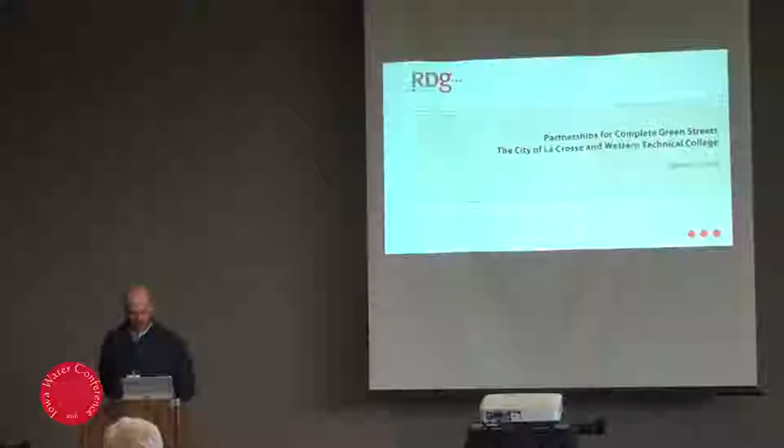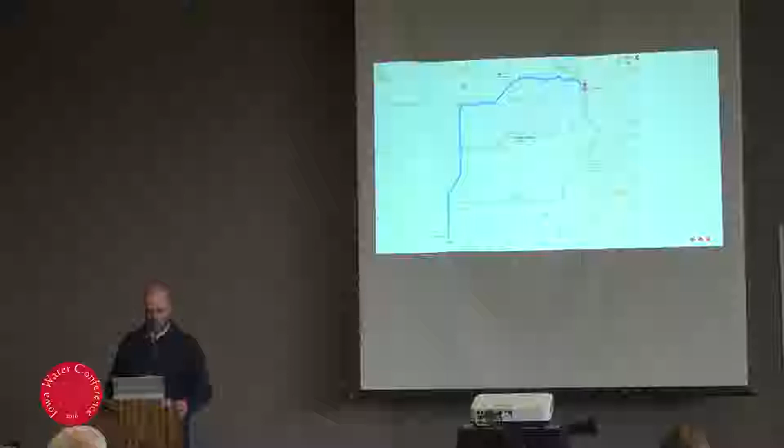So we're going to jump right in here. This is a project, a very focused case study on a campus that we've been working on for 10 years in La Crosse, Wisconsin. It's about 3 hours and 45 minutes north of here.

We're here in Ames. You head up to Albert Lea and take Interstate 90 over to La Crosse, which is in the Driftless region. Our project location is located about 6 blocks from the Mississippi River.

So here is the campus. If you're familiar with La Crosse at all, you come in from the west into downtown, and you can see by the amount of impervious cover here, it's a very urbanized environment.

We were working through a number of considerations really early on as it relates to stormwater, and this college really took this seriously.

So you can see their proximity here. The blue outline is their campus boundary. The Mississippi River is right back here in the background. There's actually a bog on the north end, and they're located on a historic floodplain along the Mississippi River.

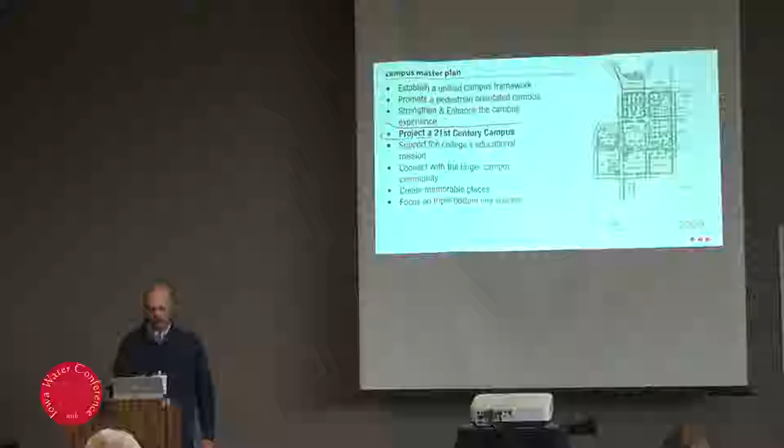Our project started in about 2008. In 2009, we completed a campus master plan. One of the key things coming out of that was they wanted to identify as a 21st century campus.

And what does a 21st century campus look like? There's a lot of emphasis on really trying to be cutting edge at that time. This is 10 years ago when we started thinking about these things.

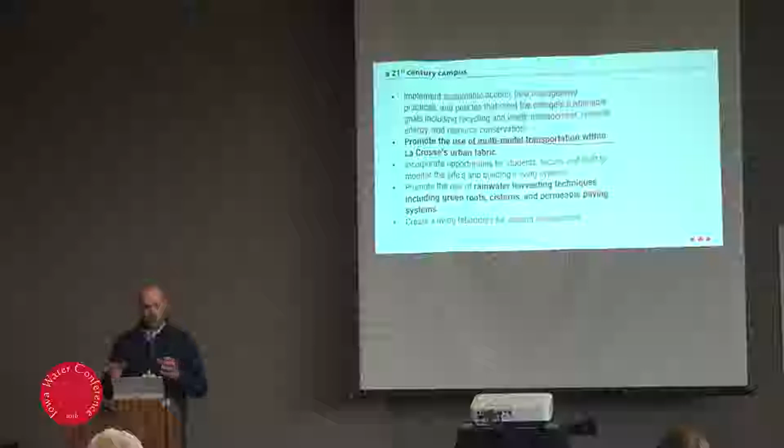Multimodal transportation was a key thing. They wanted to connect to the community. University of Wisconsin-La Crosse was there, and Viterbo was also there. So there was a culture about using transportation that wasn't always reliant on your car.

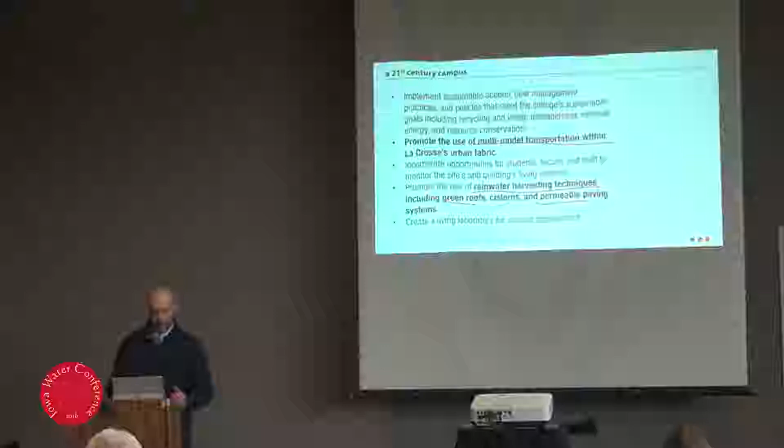They also thought very heavily of rainwater harvesting, green roofs, cisterns, permeable paving, best management practices, stormwater infiltration. These were all key things to them that would define who they were to the community and to the state.

So we took a watershed approach, and keep in mind we've been thinking about this for about 10 years, so we're going to go through a lot of information here.

One of the key things as part of that master plan was to integrate best management practices on all the projects. That was just a given - you will do this. And so that was really a great thing to be a part of.

Some of the other key things is that they wanted a reduction in flow for the 10-year event to help them comply with the City of La Crosse's stormwater utility. In La Crosse, the utility is $13 per ERU, significantly higher than most of the credits or the rate structure within the state of Iowa, so there's actually a financial payback to doing some of these things.

We were also helping them renovate from a sustainable design standpoint quite a few buildings on campus, serving as the lead consultant through our architecture branch of RDG, helping them identify strategies. As part of that process, we wanted to make sure that we complied with all the LEED credits.

So there are a number of layers here that we were working towards. One of the key things, they had set up this east-west axis through campus.

What we'll dig into here in terms of what we're calling our 8th Street project is this corridor, which was really also wanted to complement the primary flow of pedestrian traffic on an east-west basis. As they grow, residential uses were up here, and to the east. They wanted to bring these people safely down into the heart of campus, which is really these 4 buildings.

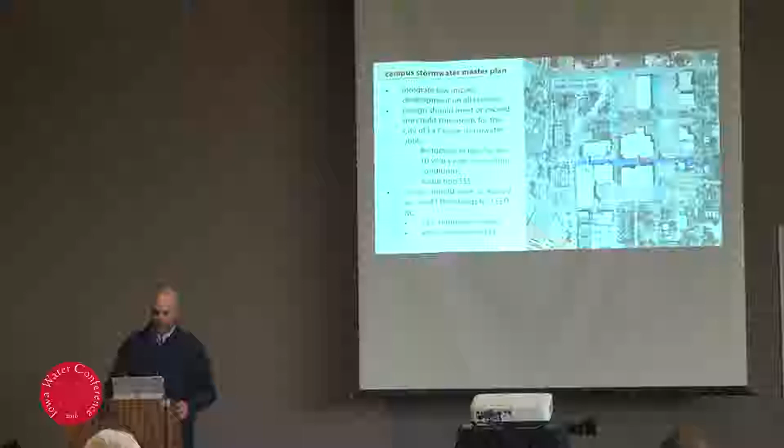When we're thinking about a watershed approach in an urban environment, we have to be mindful of where the water is going, where it's coming from, and what the existing storm sewer capacity was. We had a 60-inch storm sewer that was 100 years old, built out of brick, 18 feet below grade, and that was surcharged 6 blocks away from the Mississippi River, so we had to be careful about adding more water to that system. We knew we were trying to remove water from that system and get it into the ground.

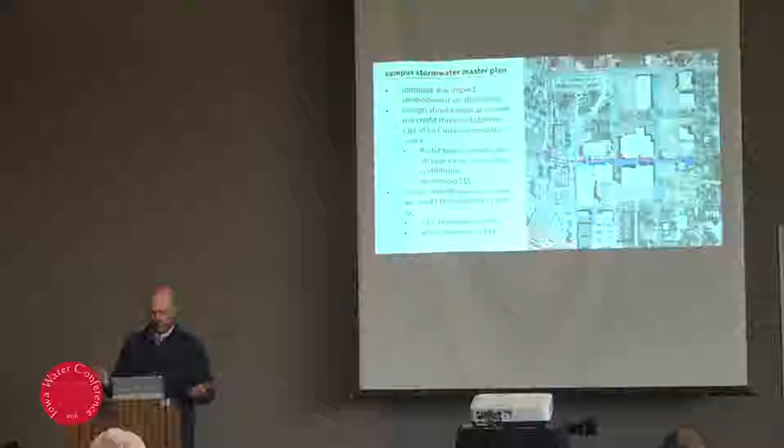We had good sandy soils here, so we were fortunate to be able to do that. But every space on campus, we had to think of if it was green, because about 90% of the campus is impervious. Any green space we had, we wanted to also think about as blue space. So we had this parallel track that if it was an open space, it needed to also function that way, working through all of those layers as part of the master planning effort.

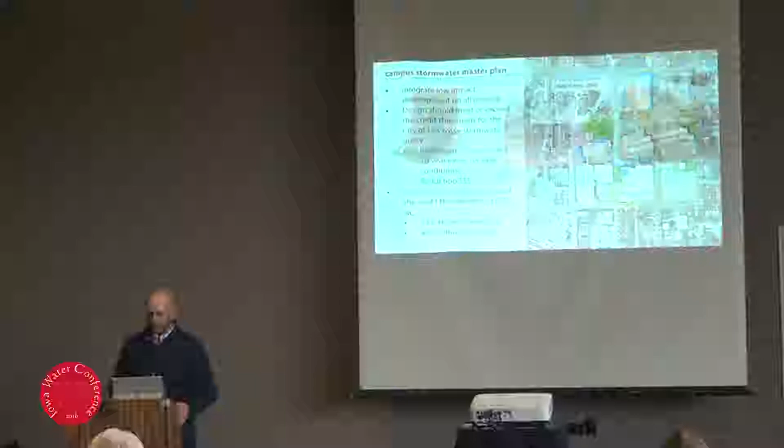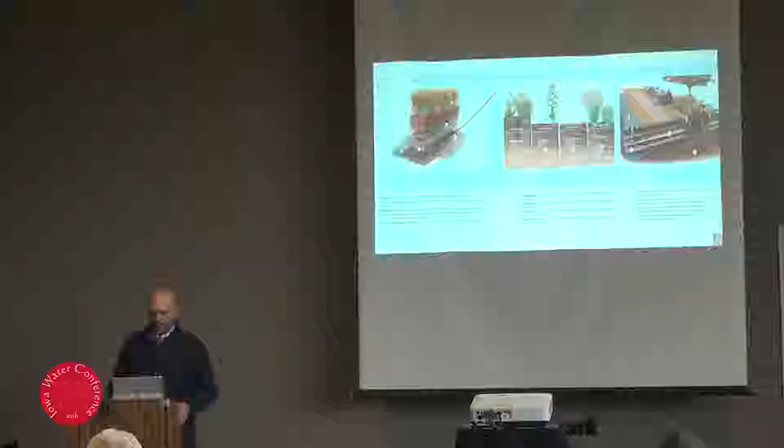We had a number of systems we identified through that project: stormwater planters, which is one we'll focus on, but also soil health was a component of all the plantings. We used permeable pavers where possible, rain gardens, bioswales, and porous asphalt. All of these practices are on the campus and have taken shape over the years. We also helped with a green roof and a 15,000-gallon rainwater cistern that we've actually been able to use to capture water and irrigate all of the plantings for 7 city blocks. It's pretty comprehensive, a lot of layers here, and when you're working in a city that's 100 years old, there's a lot of infrastructure below grade that you don't see.

In 2009, we did the first project that was built. There's a courtyard project, but the thing I want to focus on here is these traffic calming bump outs. These were designed for that east-west axis, this is one of the courtyards on the west end of it. We put these bump outs in to slow traffic, but also use them as an opportunity to infiltrate stormwater.

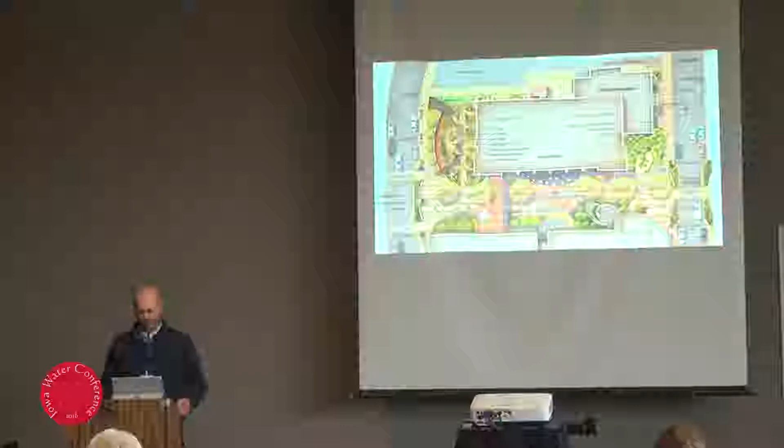We had to rely really heavily upon the Portland Stormwater Management Manual to get us going in the right direction. This was kind of cutting edge at that point in time, and we didn't know a whole lot about it, but we did a lot of education, educated ourselves, did a lot of research, and reached out to folks in Portland to talk about it. We came up with this master plan, and ultimately these bump outs had what we called stormwater planters at the time.

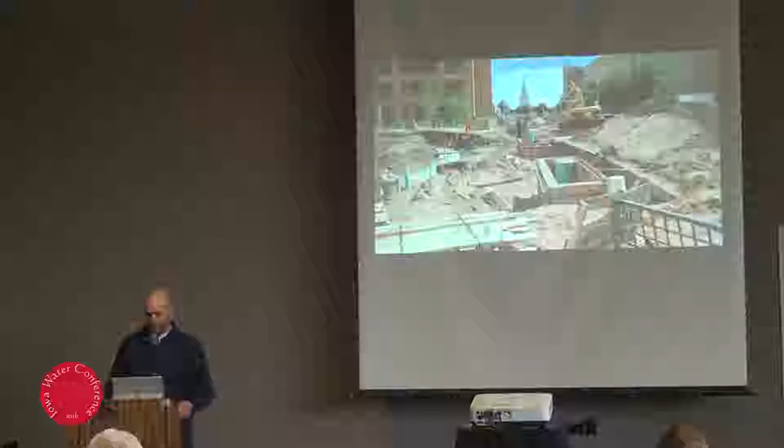Fast forward to construction, and this was really a nightmare. Our survey wasn't the greatest, and sometimes things get missed, but when they opened up the street, they found a 6-foot by 6-foot duct bank with the City of La Crosse's primary. We had designed this great system of sediment sumps where water would flow into the back of curb, the sediment would drop out, and then it would overflow into the planter and infiltrate. That no longer could happen, so we had to rethink how that system worked.

We ended up putting erosion control stone on the surface, having crews come back and replace it every so often. We were able to get it into these 2 planters here, but in the back, where that bump out is, we had to go to all-surface treatment to remove the sediment. We did it on both sides of that city block of the courtyard, and it took an entire summer to do 6 planters, all cast in place, down to frost so they wouldn't move. There were limestone monuments and gateways on top of them. It really just took a really long time.

After talking with the college, we thought we need to find a better way. So fast forward, a couple years later we started thinking about this project, and it didn't get built until 2016 and 2017.

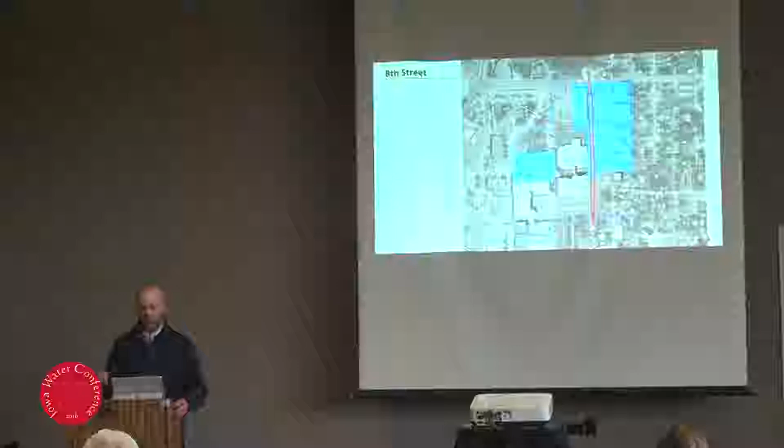We call it the 8th Street project, the north-south pedestrian axis. It's also a fully functioning street. The project we were talking about a moment ago was on the east-west axis for students. This is an image of what it looked like before, not very conducive to a friendly pedestrian environment. A lot of parking lot right up to the street, not a lot of open space, not a lot of buffering, not a lot of vegetation. Pretty harsh environment, and this is looking south down that street.

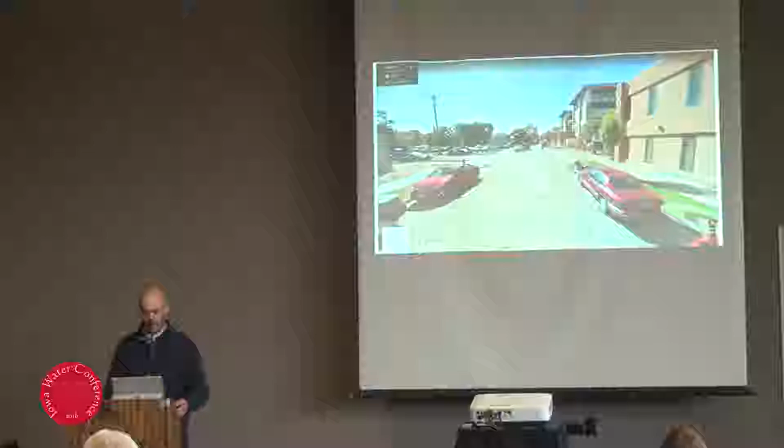In 2010, the college said they wanted more green space since they had none, so they asked us to look at a number of site plans for these parking lots. The photographs we showed were taken about right here, looking both directions. We wanted to find a way to save parking, since that was in demand, but also add more green space and create a pedestrian mall that students could traverse up and down.

We met with the city, and that was really a no-go. From a city planning standpoint, if you put your planning hat on, you don't want to interrupt the grid. So we were trying to balance campus planning versus city planning ideas.

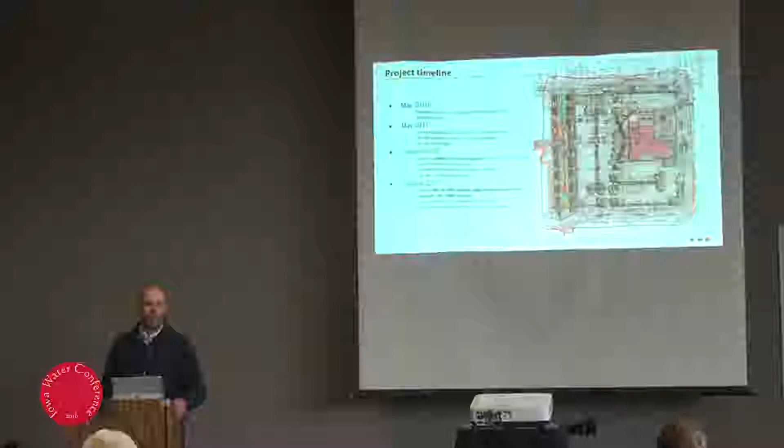So we came up with this idea: let's request a street vacation, but only for half of the street. In 2013, we presented the idea of a complete street concept where we would vacate 30 feet of right-of-way on each side so we could put in the pedestrian improvements we wanted and also use that area to infiltrate stormwater.

Most of the time, if you're familiar with the regulations of any community that has a stormwater utility, you can't use public space to infiltrate stormwater. So this was our way of getting around that.

We basically built a public street, but only half of it was really a city street. The city then got an easement back over the portion they vacated, so nobody really knows the difference, except now we can take credit for infiltration within that area.

As part of that agreement, we also agreed to manage all of the city stormwater through one system, so there wasn't city water and private water separately, it was all together.

Finally in 2014, the city approved the partial street vacation, and then we moved forward with construction drawings, with the preliminary and final design phases in 2015 and 2016.

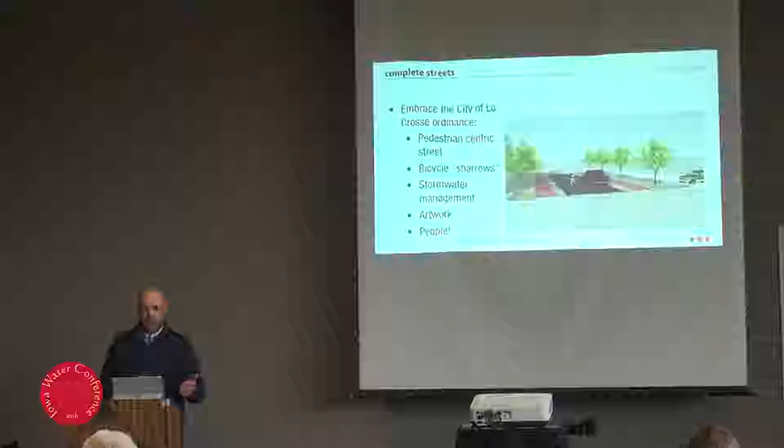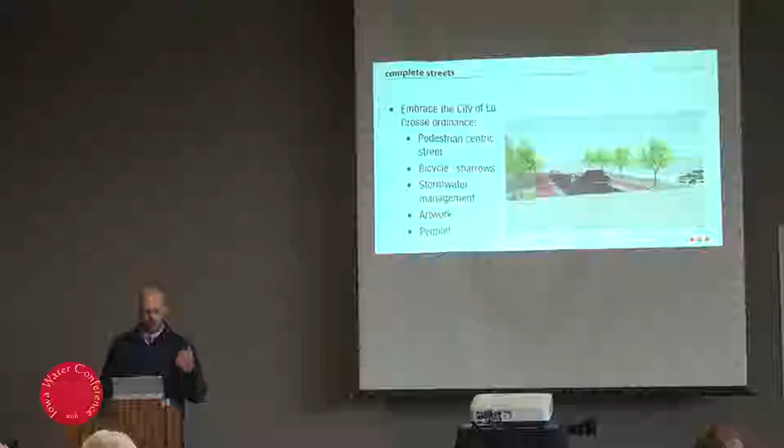These are some of the key things we had to go through as part of that process: looking at a pedestrian-centric street. The city had just passed an ordinance promoting complete streets, and they also needed to be green, so bicycles moving through here, pedestrians moving through here.

We didn't actually have a bus system on this street, but they also wanted it to be safe for people, with appropriate lighting and places to sit.

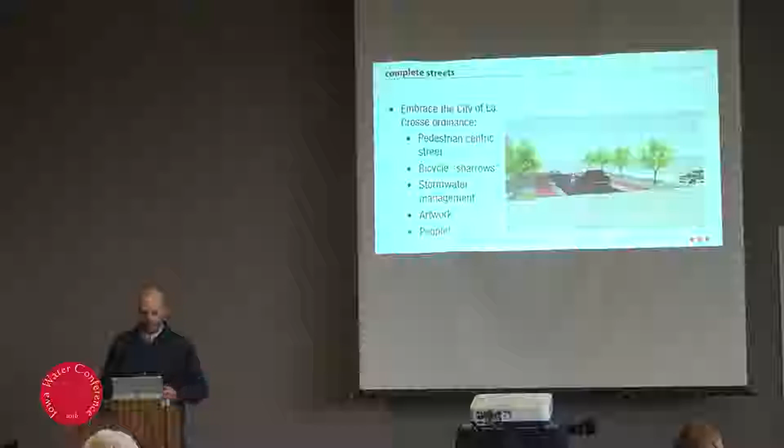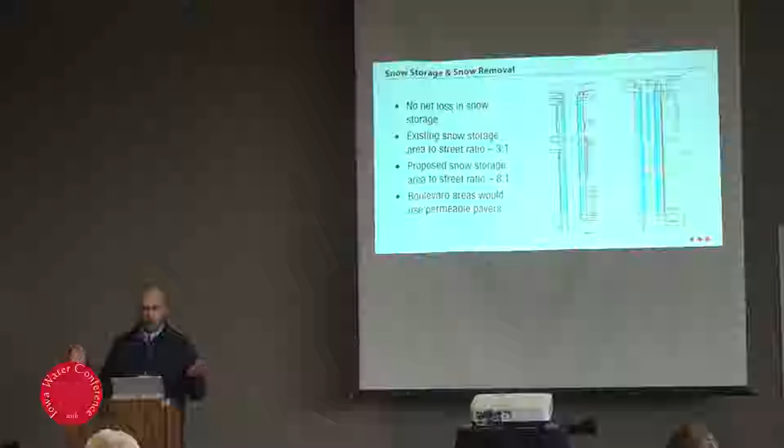There's also the very pragmatic things, like where are we going to put the snow? We had to go through an analysis, and we actually ended up with more snow storage area because we had less street to plow.

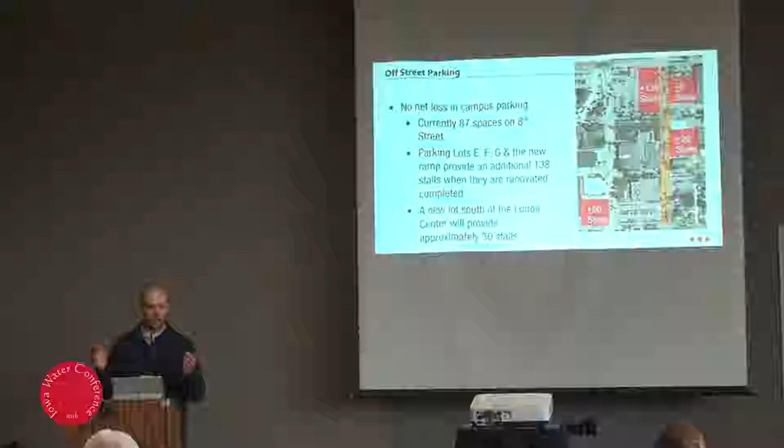We had to think about parking, and what we were going to do with all the parking that's on the street, because we were actually removing on-street parking. As part of the long-term campus planning, we looked at adding stalls elsewhere within a parking ramp. The college valued open space more than it did parking, so we had to work through that.

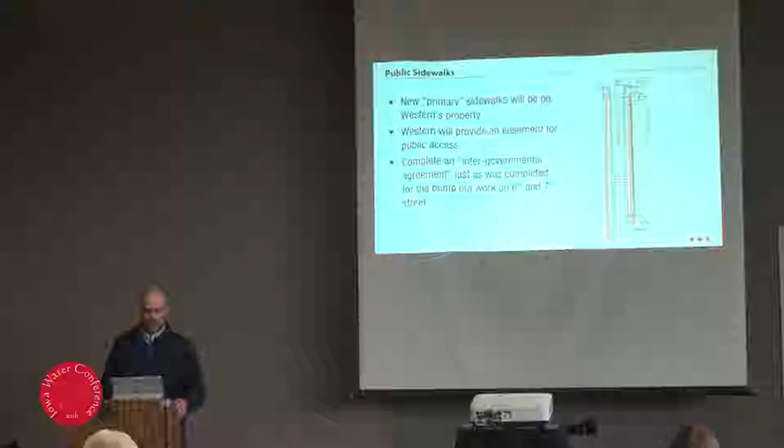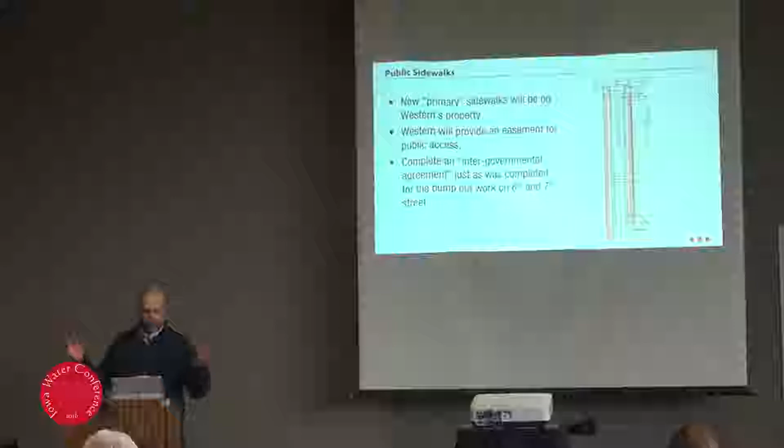Public sidewalks - showing them how the new sidewalks would be virtually in the same location, but would be better served because they would look better, be wider, and be more accommodating to the larger flows of pedestrian traffic.

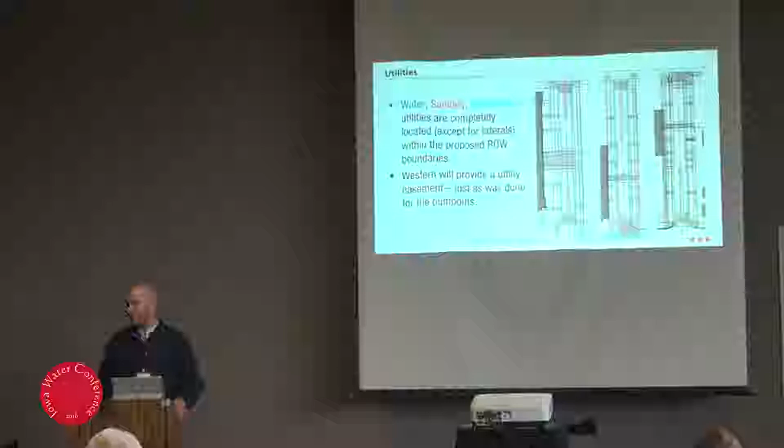Utilities - again, with it being a very old community, there were a lot of utilities, and we found quite a few underneath the street when we opened it up. They were always right where we thought they were going to be, right? Exactly, yeah - a new fiber line that wasn't on the survey, that was fun.

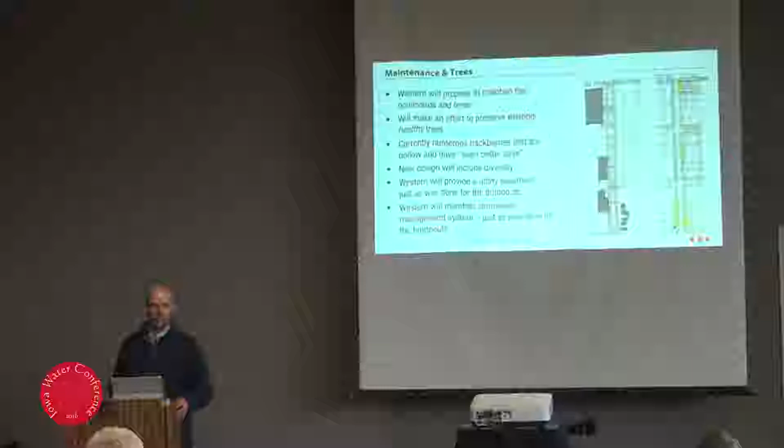Street trees - trying to make sure we preserved the healthy ones that were there, and there weren't a lot. We also added in new trees, since this is a Tree Campus USA, and they really valued having that canopy.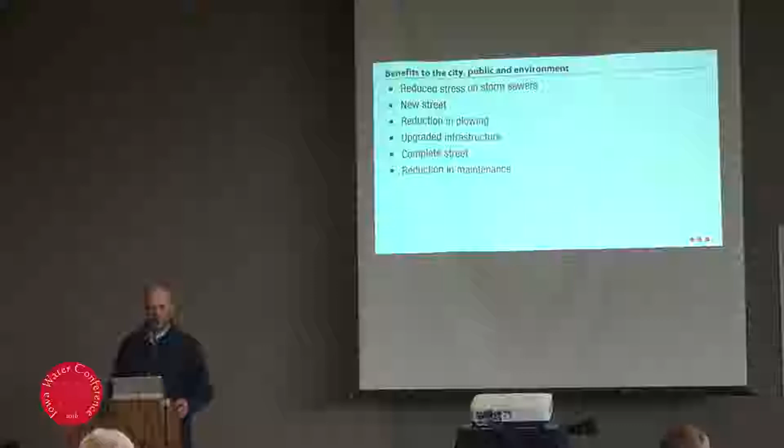Finally, after the city and the community came together, these were the key benefits: reducing the stress on storm sewers, the city getting a new street, reduction in plowing, new infrastructure, a complete street, and reduction in maintenance.

So now we'll jump into the engineering - Greg will walk us through that, and then I'll jump back into some of the design of the components.

So what we're showing today is really one of about 3 pieces that I've been directly involved with. I kind of joined this project mid-run. I joined RDG late in 2014, so I've been with this project for about 3.5 years now.

So this is just one example of how we looked at stormwater. We really wanted to make it hard for water to move off the site. We weren't looking at just having one practice on a site. We were looking at dividing the site up into multiple areas of drainage and really trying to look at installing practices in sub-watersheds scattered throughout the site.

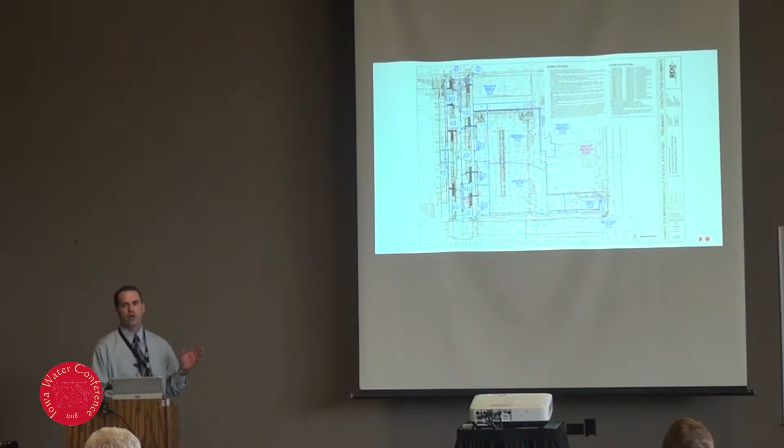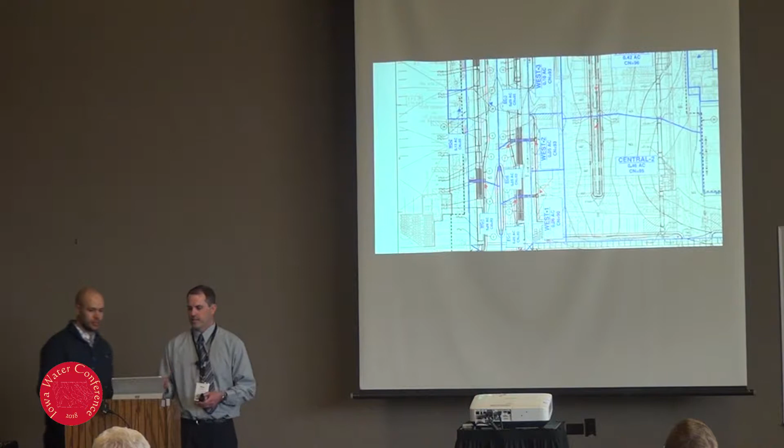So you can see a drainage map and zooming in how it all looks. Water is draining into some of these central islands, and then also some of these planter boxes through inlets, which we'll show some pictures of in a little bit.

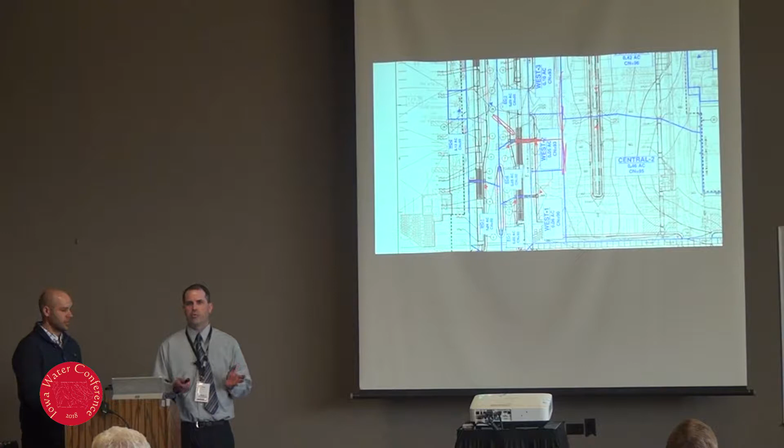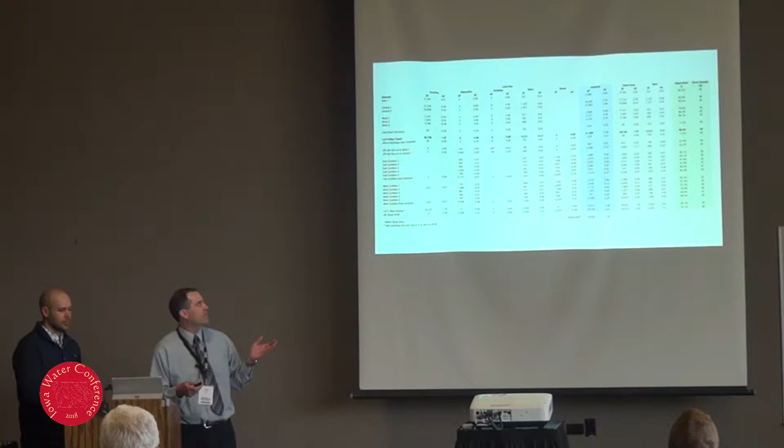So we really had to look at this on a technical level. We had to break it up into watersheds. We had to analyze what's the impervious cover in each of these watersheds. Really get an idea of open space, impervious cover, what are our runoff curve numbers, what are our curve numbers for both water quality and for the larger storms. So breaking it down in a lot of detail for a lot of small sub-watersheds.

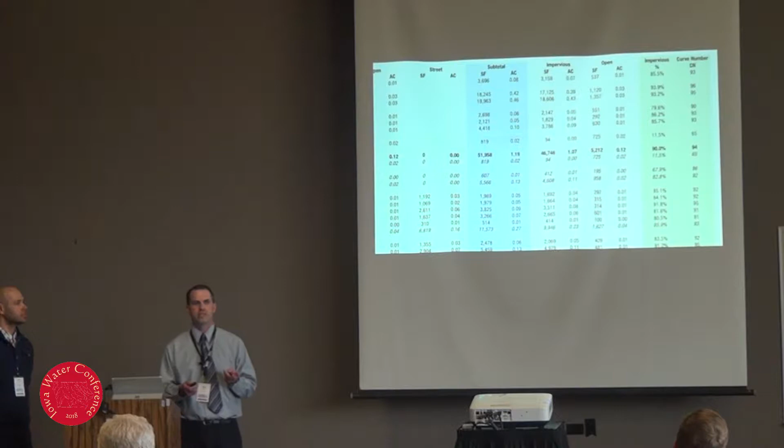We then incorporated this into 2 different types of stormwater models. One, many of you may be familiar with the TR55 model, so you're actually developing a hydrograph where we're looking at these different areas, the areas they shed, the percent impervious, and how quickly it moves off the site, having the computer program run a simulation and figure out, in a single storm event, what is our peak flow going to be? So one event at a time.

And our big concern there was we were trying to reduce flow for the 2-year, the 10-year, and the 100-year storm events, because that was one of the city requirements.

Another analysis that we did: in the state of Wisconsin, when you do infiltration practices, you have to do a Win SLAMM analysis. This is a software program that's been developed, and it's actually fairly easy to use. You can analyze these practices, and instead of a single event simulation, you're running a 30-year simulation.

So it runs multiple storm events based on, for this area, rainfall events that happened from the 1960s to the 90s. So they're actual real rainfall events that they feel like this 30-year period is representative of what would normally happen in La Crosse.

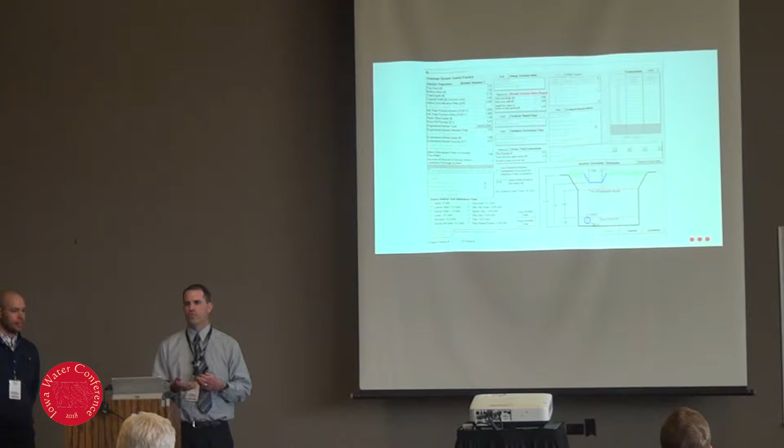So you take that, you enter in all your information about your different stormwater practices. This happens to be for a bioretention area, but there are other practices in the software where you can enter the properties and how you've designed it, and then you run it through the system and it'll tell you how much flow you've reduced, how much of different pollutant loads you've reduced. So you're not just looking at a single event peak flow, you're looking at overall volume reduction and overall reduction in pollutant loading.

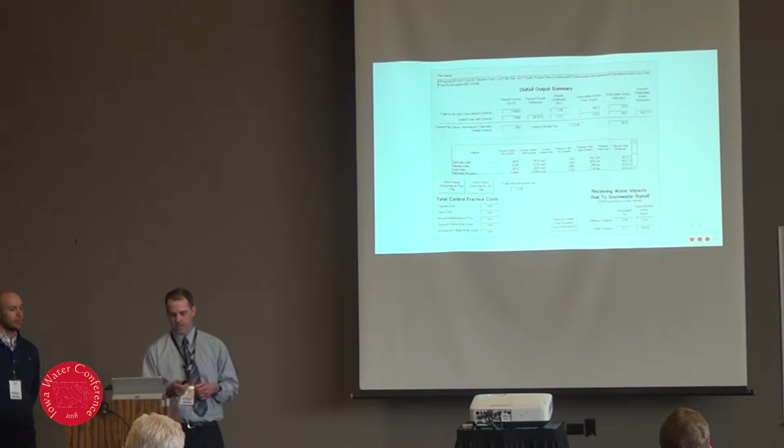So you can see on the screen here where it spits out and says, okay, this is how much less you're going to have in particulate solids, total solids, and phosphorus. Those are some of the things we were looking at on this project.

So we looked at all of these sub-watersheds and practices, and then had to comprehensively, for all these sites—this is just an example of one of the sites—get to an understanding of how we were doing on a site-wide basis.

So you can see here on the column on the left, that's the total input loading in TSS that we have, and then the output, and you can see the reduction from all these improvements collectively. We're expecting almost a 90% reduction in TSS from the site. And Wisconsin requires, on sites like this, a reduction of 80%. So we actually exceeded the state requirements.

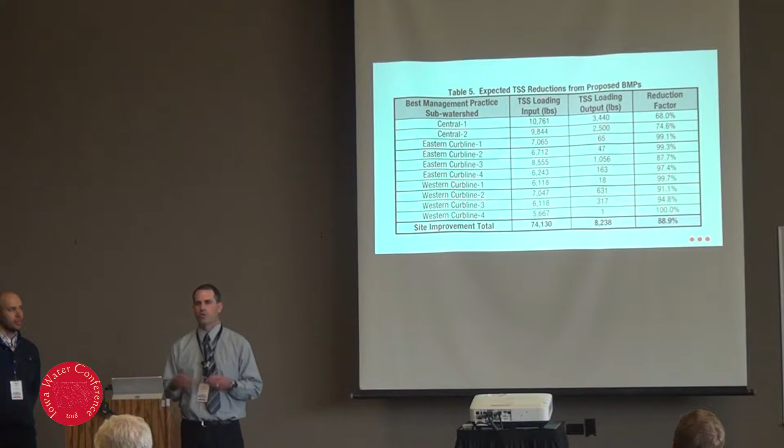On the other side, as I mentioned before, we were also looking at peak flow reductions. One of the keys, not only to meet city standards, which required reductions for all these events, but to get credits for the Stormwater Utility Fee, that's tied to reduction in the 10-year event. You can get up to a 50% credit for that.

In this analysis, we were able to reduce peak runoff during that storm event by about 23%. You can also take up to a 50% credit for TSS reduction, and we exceeded that. So our total ERU credit is 73%.

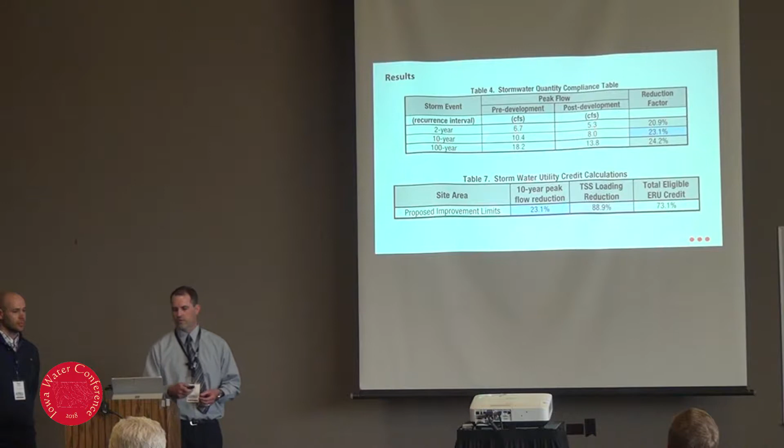What that means is, at this site, Ryan mentioned their fee is $13 for every equivalent residential unit in their city - I think it's around 2,500 square feet for an ERU. They're paying $13 for every one of those they have. After these improvements, they were able to work with the city and reduce that fee by 73%, so they're only paying $2 or $3 a month instead of $13. That's a big financial impact for them.

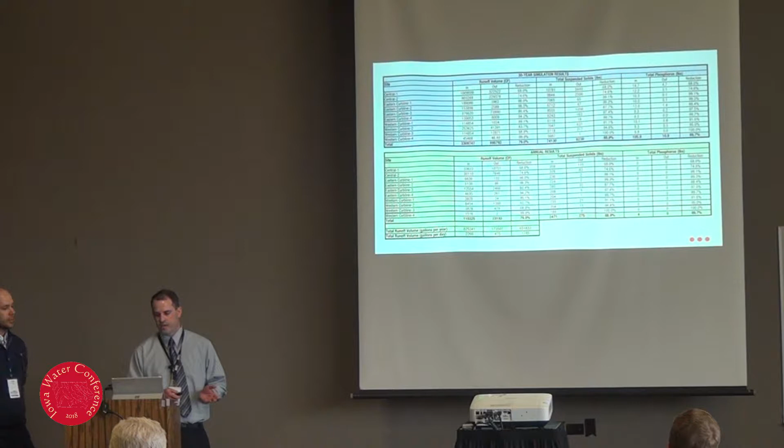We can also dig deeper into the numbers. You can look at not just our volume reduction and TSS reduction, but phosphorus reductions. We're seeing similar results there, almost 90% on phosphorus reductions, and a lot of this is tied directly to the volume reductions we're seeing at this campus.

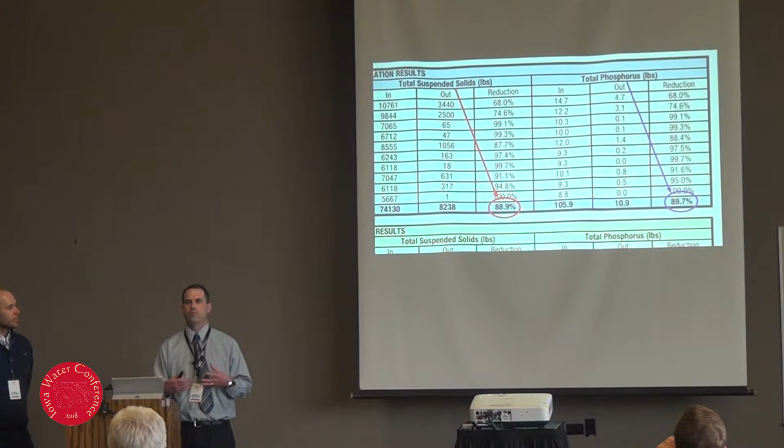Very significant volume reductions. This is one of three sites, but at this one site alone, over 650,000 gallons every year is reduced. And this is only about a 2-acre site - very significant reductions in flow going into the storm sewer system and into the Mississippi River.

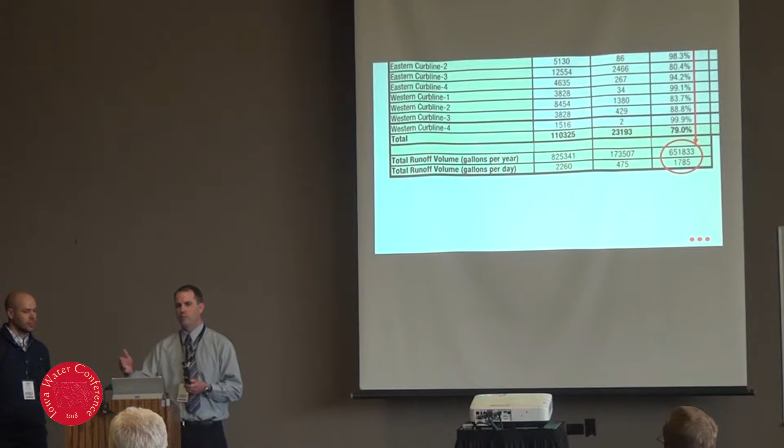Along with that, we're also reducing suspended solids and phosphorus loading. So when you sum this up, we've done a comprehensive analysis of not just this project, but the two previous projects that have happened over the last 3 years that I've been a part of.

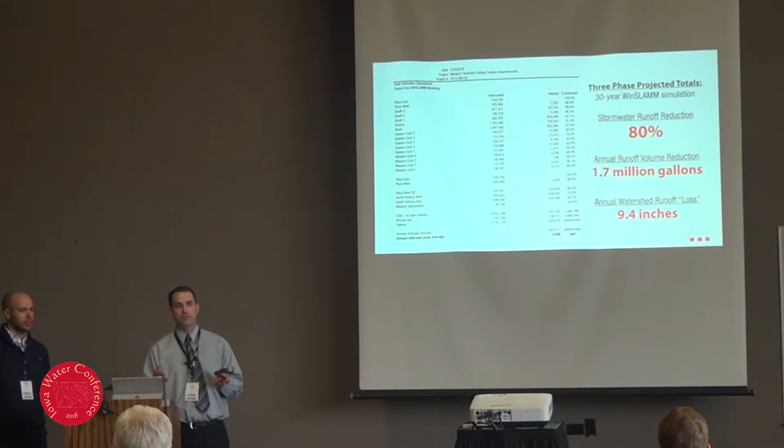If you combine all of those projects together - remember, this is on a very urban campus, these are parking lot renovations, very impervious by nature - we're seeing, as opposed to if we did nothing, just curb and gutter and storm sewer letting it all go, an overall volume reduction of 80% on an annual basis. That translates into about 1.7 million gallons of water every year.

If you translate that to this specific site area, that's equivalent to about 9.4 inches of rainfall every year that used to fall on this site and go to the Mississippi River. Now it's staying on site, being used by plants, or infiltrating into the ground.

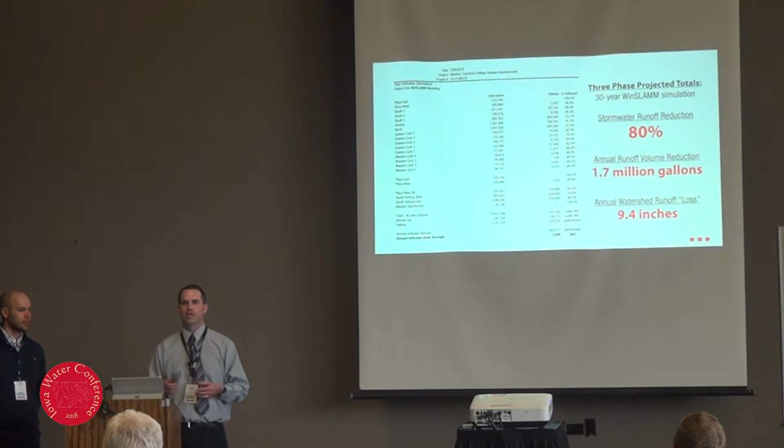One other interesting aspect is all the layers of permitting we had to go through for this. La Crosse has its own review and construction applications. There's also their program - instead of NPDES like we call it here in Iowa, it's WPDES - but it's basically the same thing, an erosion, sediment, and pollution prevention plan.

You actually have to send in an Excel spreadsheet they designed showing you meet certain loadings - you have to be below a certain tons per acre per year, and show you're putting in practices to reduce that by a set amount in order to get approval of your SWPPP, then send that into the state for approval.

Also worth highlighting, there's a state plumbing permit - if you have any kind of infiltration practice, you have to go through this permit with the state. Because there's only a certain number of people working at the state, you need to keep that in mind. On our first project, we all kind of got into a panic because we realized we had to do this.

We didn't realize there was a 2-month waiting period to get the review done. So we begged and pleaded, and they were able to expedite it - but to get an expedited review, you have to double the fee. We were like, okay, we'll pay the extra fee to get this done. So when we did the next phase of the project, we made sure to pay attention and plan ahead.

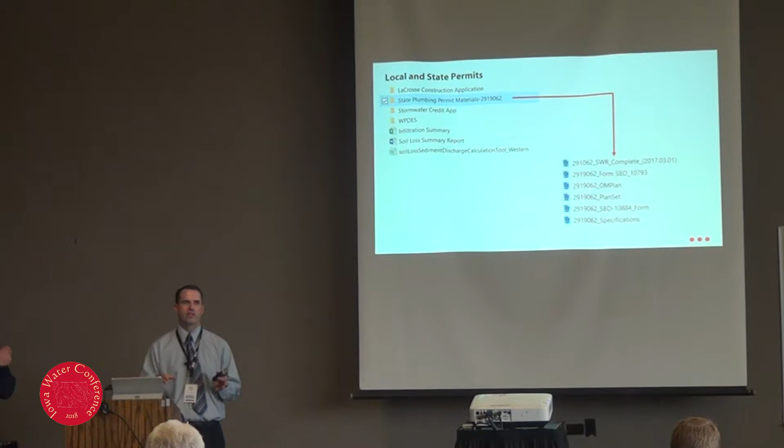You go online, get a scheduled time, and send your plans and calculations, and you have to do an operation and maintenance plan, and send it all into the state electronically. They review it, send comments back, and you make revisions. It came back pretty clean—made a couple of last revisions, and then we had approval. So once we got in line, it didn't take very long.

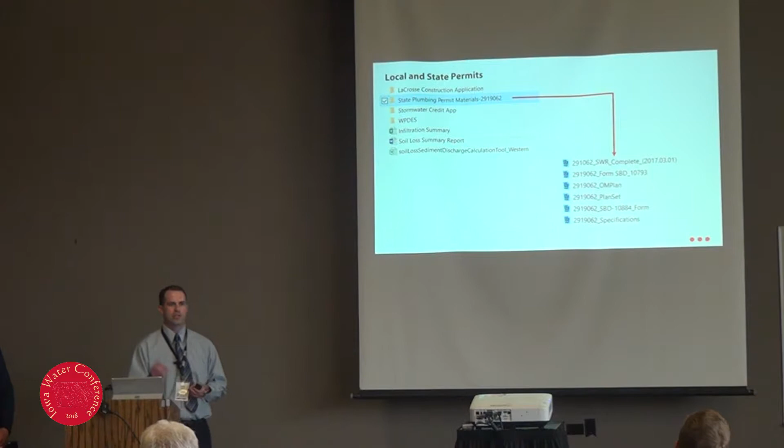It took maybe a week or two, but getting in line was the trick. Then there was the stormwater credit application—when it's all done, we had to show evidence in our stormwater report that we've reduced flow by this amount, reduced TSS by this amount, and are eligible for these credits, so ultimately our client saves money every month.

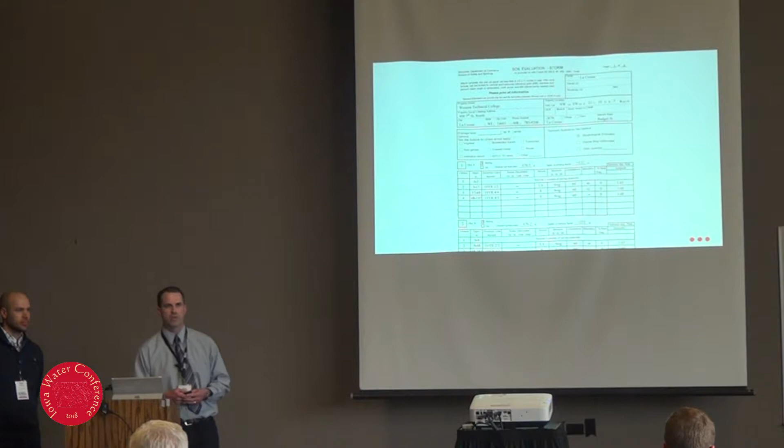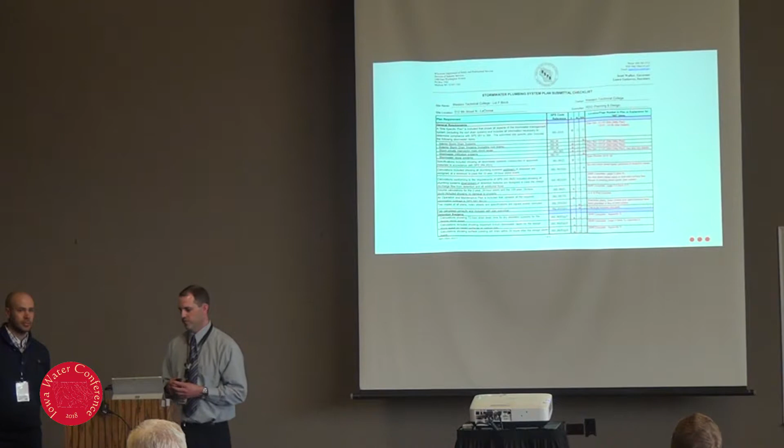A couple things that went with that stormwater permit were this soil evaluation form that a geotechnical engineer had to sign, proving what we thought the infiltration rates would be for this practice. And then there's their handy checklist—this review checklist is one of two pages where you fill it out and identify exactly how you're fulfilling their requirements. So I'm going to toss it back to Ryan because he's got great pictures to show you, and I've shown you enough numbers already.

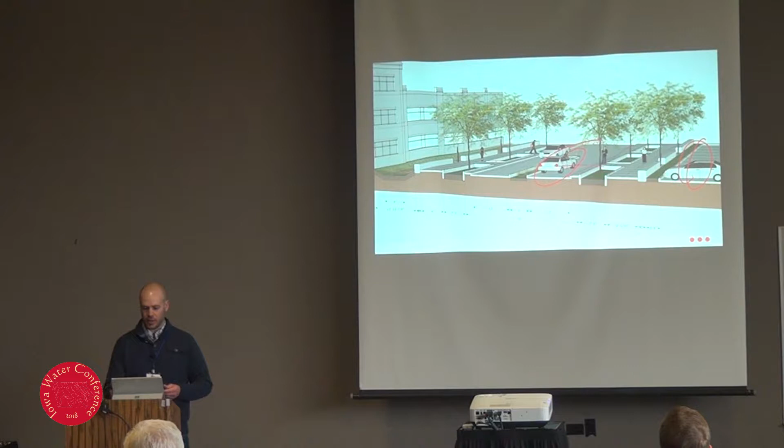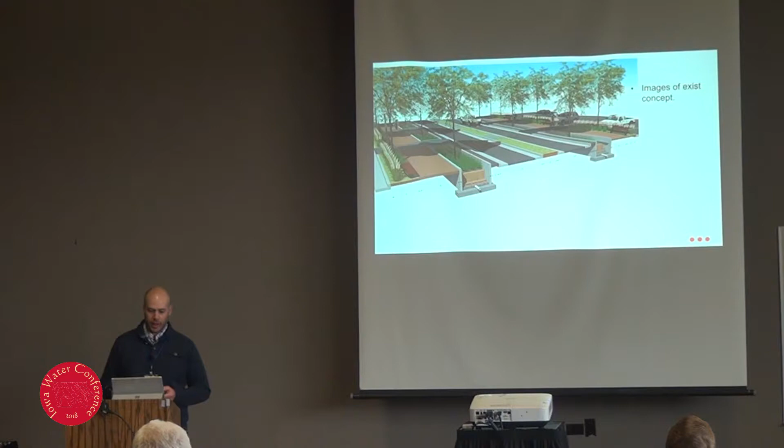Thanks, Greg. One of the things we always try to do on our projects is make sure we're using stormwater as an amenity, not something just sent downstream in a pipe. We thought hard about how to take water from both the private side—in this case the parking lot—and from the street, and use it to beautify the campus. These were various sections we did early on to show how these systems could work, and how water would move down the street into these stormwater planters.

In this particular scheme, here's an exploded axon. Water would flow down the gutter, spill over into a sump, and once the sediment drops out, it would fill into this stormwater planter.

The final design ended up changing. Here we were exploring the use of a runnel to help spread out the water, but we ended up eliminating that from the project. We also wanted to make sure we had trees, so a lot of care went into the design to allow tree roots to go out of these knockouts.

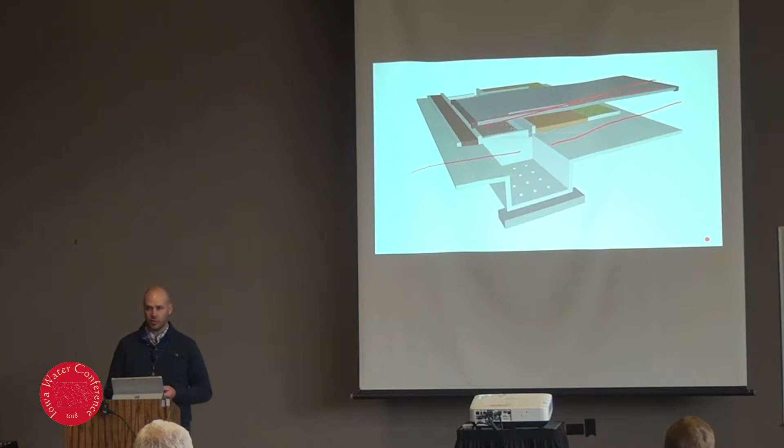Because we were trying to get water across the public right-of-way and from the street, we put bar grating over the top so people could see where the water is coming from and where it's going. It would also subtly communicate that there's more going on in this street than you might think, which was an important part of Western's academic mission—leading by example and demonstrating. They were all about showing off the system.

These are various models. Going back to my earlier comment about that other project taking forever, we developed this system—consider it Legos—that could be put together in blocks, these precast walls, assembled into a 9-foot planter, a 12-foot planter, an 18-foot planter, a 24-foot planter, or 36.

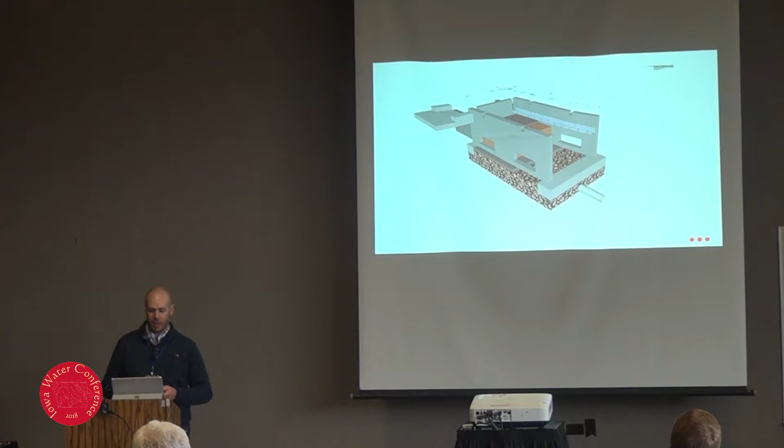It was scalable, so when Greg was doing the stormwater calculations, we could use our kit of parts—precast parts picked off the truck and set in place—and have it go very quickly. Rather than taking months, they got all the planters in a week and a half, significantly expediting the project.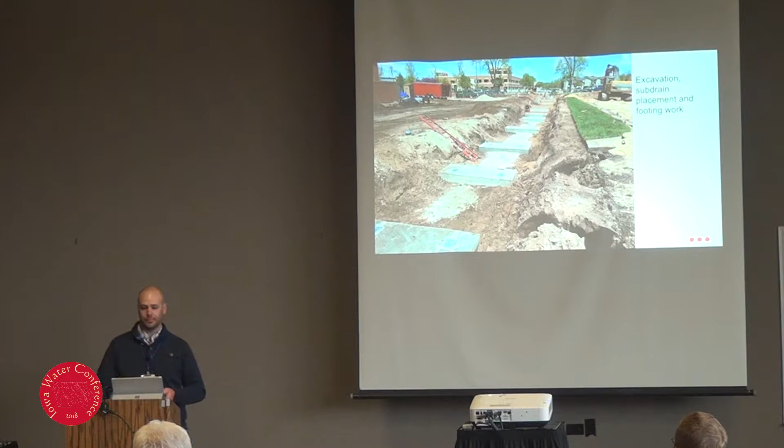Just to highlight that—on the side pieces, you only had three different sizes, right? Yep, they could be cast off-site in one location in three different sizes, then assembled on-site to make different sizes of planters. Then we had the end cap, so there wasn't a lot of customization. It made them not only quicker to build, but more cost-effective to manufacture.

A few photographs of construction, which I'm sure our insurance company wouldn't want you to see. But these are the footings going in, and you can see they've embedded the plates here where you would weld the corners.

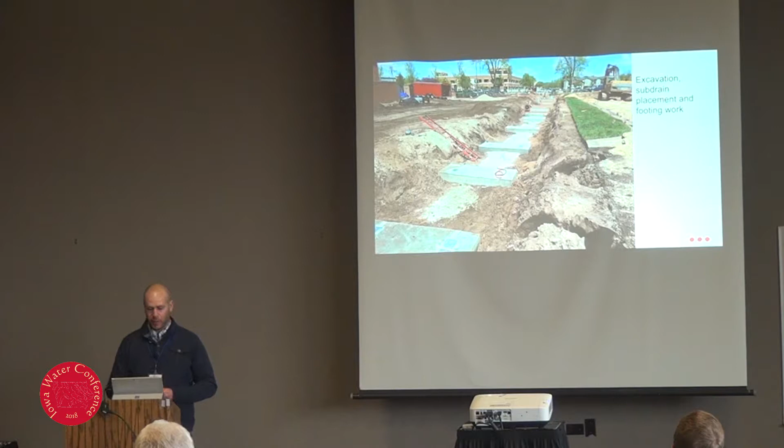We did a mock-up, and these planters weren't colored concrete. We were trying to keep them very raw, but then put a nice finish on them. It was kind of a borderline between an architectural finish and then a precast, just storm sewer kind of finish that you get from that.

Here they are going in. Some of the planters did have a stormwater function, and you can see here some of them didn't. Those that did not have a stormwater function didn't have to be nearly as deep.

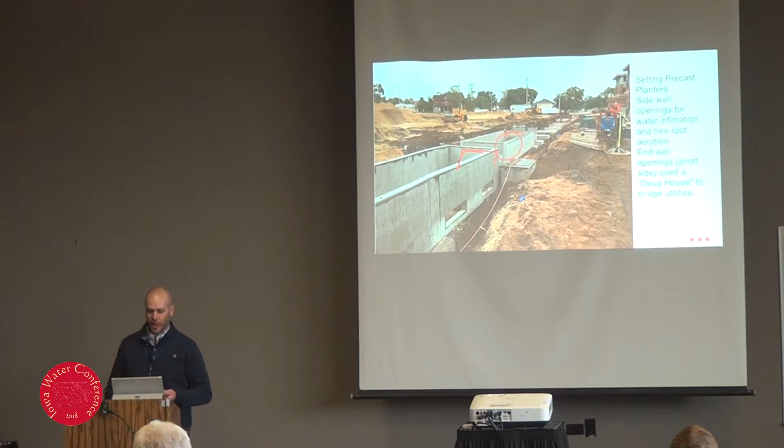One thing you're not seeing here is that we found a fiber line that had just been put in. We did the survey one year, and then they put the fiber line in the next year, and we didn't know that. So we had to do knockouts. We revised the design so that in the end caps of all these planters, we had a dog house that could be set over any utilities so you could run them right to the bottom of the planter. There was a lot of thought that went into how we could get these in efficiently and how they can do their job.

Forming up for the frame that you can set the bar grating on. Hey Ryan, can you take a step back too? One thing to highlight here is the grating Ryan was talking about earlier, and this is how water enters the system.

On the street side, and actually on both sides, we decided it was simpler to just take a regular intake and build it like a sump. So there's just a regular standard precast inlet there. The water drops into it, acts like a forebay. The water sits in there, the sediment drops out, and as it fills up, there's a knockout in the back. Once it fills up to a certain level, it spills through the runnel into what Ryan's going to show you.

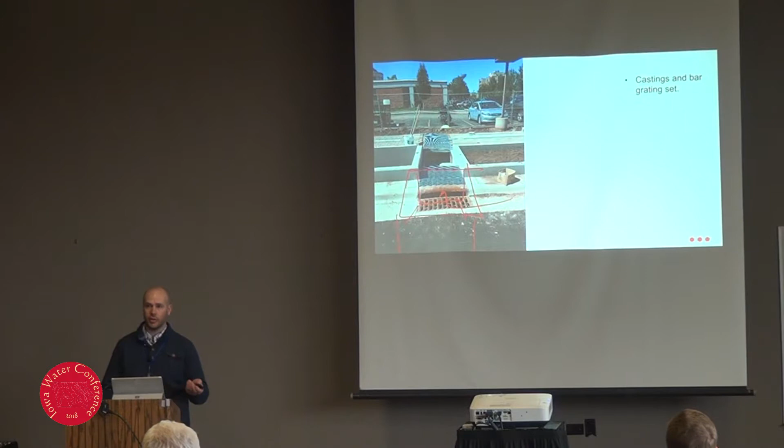There's a lot of in-the-field review to make sure things were set at the proper elevations. This street had less than a foot of fall over 300 feet, so it was very, very flat. You can see here we had some erosion control stone at the knockout where the stormwater came through.

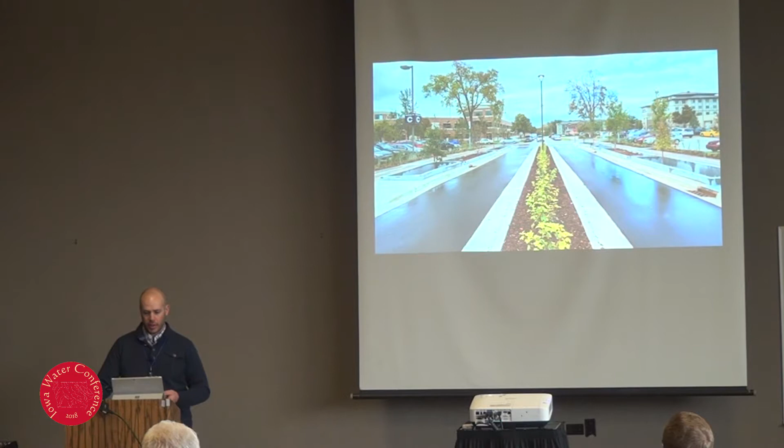If you remember, this is kind of the before picture, and this is the after picture. It rained the day we sent our photographer up there - that's usually what happens. But you can see here all of the planters and how they operate.

For each one of these inlets, there's either a pair of stormwater planters straddling it, or in some cases, like right here, only one stormwater planter and then a traditional planter next to it. Some more images, and this is just right after it was installed.

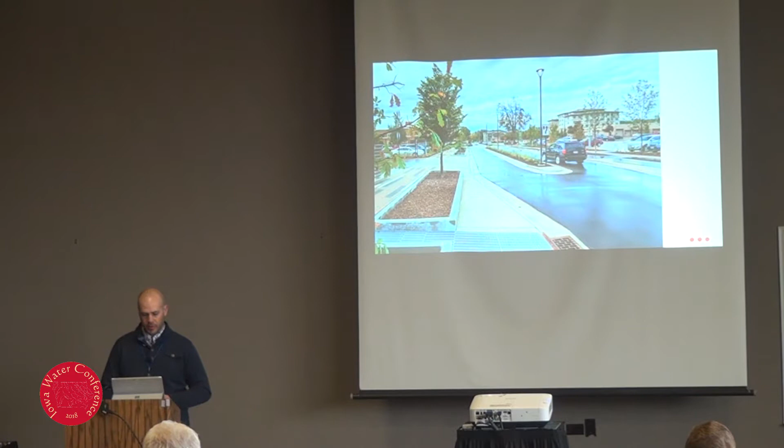If I fast forward, again, here's what Greg was talking about. Water falls in the inlet, there's a sump below, it spills over and comes into here. The drop from this pedestrian surface to the top of the planter was 28 inches.

We did this in two phases. After we did the first one, the college knew what they were getting into, this being a pedestrian corridor and people potentially falling in there. So we actually went and designed a railing system for the next phase. We received the bids on that railing or guard system and shared that with the college. They talked to their risk management insurance provider and actually elected not to do them, because if stormwater management in these types of projects is going to become more prevalent, I think the thought is we're not - it's an extra cost and it's still within code compliance. Where do you draw the line?

In other places in La Crosse, we're starting to do this as well. And it looks more dramatic right now because there's no plant material. Right, exactly. I'm going to jump ahead.

These are just - the sidewalk was all permeable pavers, all native plants. And this is a year later using my iPhone, so it's not as pretty as the other ones.